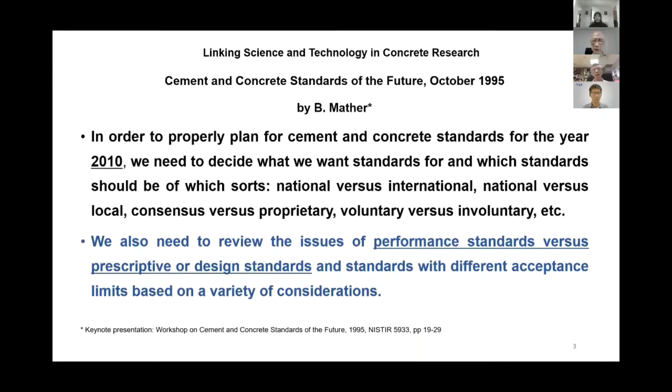Now, this concept of going into performance rather than just prescriptive or design standards, which is common—although standard conformity testing of materials is necessary, it's unfortunately not sufficient to avoid problems during actual construction practice. So today I'm trying to see what we can do with standard tests to modify and extend them to get useful information that practitioners can actually apply.

Standard tests are intended to assess the technical requirements, which are usually in a contract specification. In order to compare results from different test labs, the equipment, procedure, details on how to prepare the specimen, how to test, and the environment are highly prescriptive, so that we can all reproduce similar results using similar material.

Unfortunately, not all of those conditions that we impose on the standard test are the ones we have in practice. One of the things I learned very early is that we keep following the European practice of testing everything at 20 degrees Celsius, whereas in our environment, concrete is always at around 30 degrees in practice.

So that got me thinking about how the tropical environment needs us to adjust the way we work in concrete technology, basing on science and understanding of the technology. So today I've selected two topics.

First thing, something many of us are interested in: self-compacting concrete. One of the difficulties is how well it can pass reinforcement bars and flow around them and fill up all the space within the formwork.

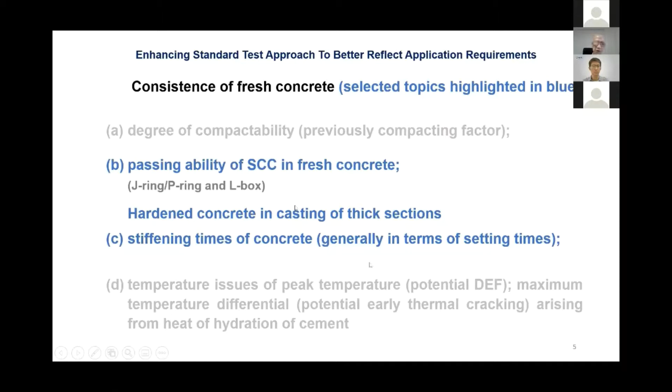That means somebody had to decide what to do at the end of the event, how we should continue. I know in practice, contractors always continue, and then we have to sort out the issues afterwards. But can we find a better way to decide what we could do? So that was the second objective.

Now this is what we call the passing ability. The word J-ring, probably because it was decided by a Japanese professor, so the J probably stands for Japan.

In this particular test, which is accepted under the EN, we have a cone of concrete placed inside the ring. We pull up the slump cone and let it flow. Some of the concrete will flow past the bars, and we have to compare the little gap here between the top of the pile and the ring, and what is on the outside, in the blue circle. The difference is what we judge to be the ability for the concrete to go past the reinforcement bars.

So you can have two types of rings. There are 12 bars of 18 mm, giving us a clear gap between the bars of 59 mm. When we have 16 bars of the same diameter, it becomes 40. So it's between 40 and 60 nominal clear spacing, which is quite common in our practice.

Now, the other measure is when the concrete flows until it reaches 500 diameter. The ring itself is at most 300. When it reaches 500, the time taken will be another measure of how well the concrete can flow.

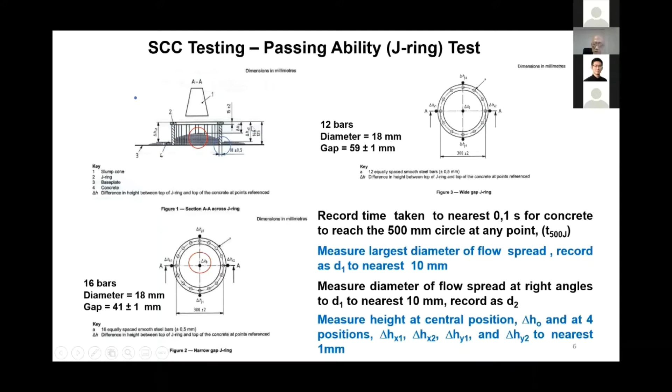Now, the passing ability of self-compacting concrete - in the US they like to call it self-consolidating concrete - using the J-ring: both in ASTM and EN we use the same ring, but we don't treat the result the same way. In the EN standard, we call it the J-ring step.

That means the change in height between the one in the middle and the concrete that flowed past the ring. This is the J-ring step, and you're supposed to have it less than 10 mm. But if you look at the actual height of those concrete, it's very close to that.

So the values in terms of repeatability and reproducibility are given in an example: about 4 to 6 in repeatability, and reproducibility 7 to 8. That means if you do the test twice, it can differ by 4 to 6 mm, and you are controlling it to less than 10. So that means there's a lot of uncertainty in the test result.

So it is not really the best test method. Now, in the ASTM, they chose an alternate method of doing it, which actually was pioneered by us in NUS.

We look at the flow diameter rather than the height. That means the flow without the ring and the flow with the ring, and we call that a passing index.

But for us, we can extend it a little bit more by using the index, which I'm going to explain further, and that will particularly give us a lot of other things we can do.

Now, this was first published by one of our final year project students, and another one subsequently did a fair bit more work on this. So the passing ability index, PAI, is the P-ring flow diameter and the slump flow.

Now we call it the P-ring because we wanted to make the ring bigger. Instead of 300 mm, we increase it to 500 mm, and we'll explain why we do that, because that will give us a lot more information and flexibility in carrying out the test to meet site requirements.

Now, so this is the slump cone. This is the J-ring, 300 mm. This is our NUS design P-ring. We call it P for passing ability. My student was suggesting maybe we should follow J-ring and call it an S-ring. I said better not — I think we just call it the P-ring, passing ability ring, 500.

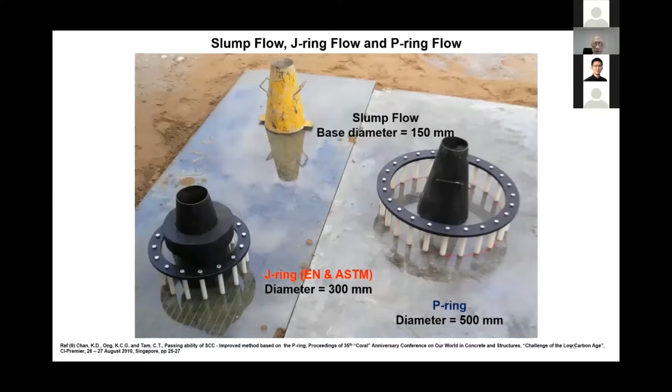Now this particular set of equipment was duplicated by our final year project student, who is now a director in one of his own concrete RMC companies in Sabah. So you can see he's a very keen person and applies what he has learned from the university to practice.

Now, in order to do the test comparatively in research, you need 3 helpers to do all 3 tests simultaneously. We all know the flowing ability of concrete changes with time. So in the research, he was all by himself — he had to do one after the other, and he complained to me that it's not fair. He doesn't know which way is the best sequence, ABC or BAC, BA, and so on. And it will make a slight difference.

So in his own study, he actually got 3 workers to do it simultaneously. And he also used Teflon bars instead of reinforcement bars because he doesn't want any friction. Because you might even argue whether the deformed bar — where the ribs, where the pips are — that will also change the behavior. So you can see in research, we are trying to be a little bit more refined.

Now, strictly speaking, we are not only talking about the gap — we are talking about the number of bars in a given area blocking the flow of concrete. So there are two ideas. If you look back at ASTM, they're talking about blocking assessment. Now that got me thinking that we should be thinking about the blocking ratio. That means in a particular cross-section, how many bars are there in terms of the width of the section, and then there would be an amount of blockage. So in a ring, it will be the number of bars around the ring, and so on. So this is what we did.

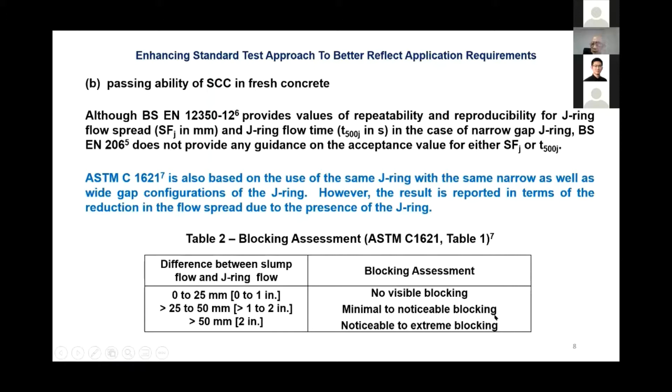So in our test, we added the additional idea of including the blockage as another parameter. So it relates to both the flowing change in diameter, the clear gap spacing, as well as the degree of blockage. So with the J-ring it's fixed — we have only two combinations of number of bars, and hence the clear spacing and the blockage are fixed, only two variations.

With the P-ring, we no longer fix the bars. The bars are put on, and we can change the number of bars by omitting some of them, and so on, using different diameters of bars. This gives us an opportunity to best simulate the project we have — from something very simple with only 20, 30 mm bars, to very big ones like 40 mm, like in a raft foundation where they are only 100 mm apart.

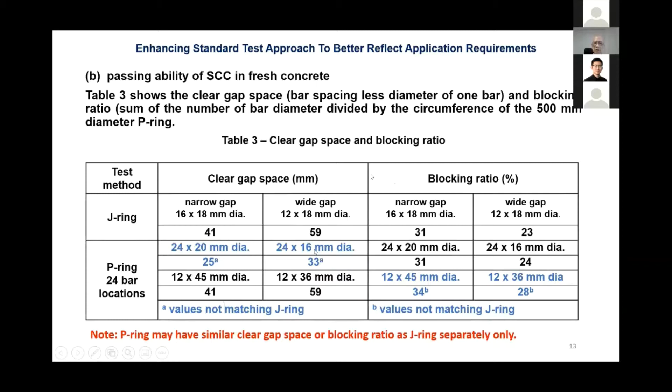Now, so that means what we can do is compare with the J-ring to get an understanding of what they have been doing, link back to practice and our experience, and yet we can now start to change the combination.

Why is the clear gap of 40 and 60 selected in the J-ring? It goes all the way back to the earlier test, the L-box. The L-box has exactly the same thing — the gap of 41 mm and 59 mm, just like the two J-rings. But then they have either 2 or 3 bars of 12 mm diameter, not the 18 mm bars, and the distance here is 200 mm. So it has also a different blockage ratio.

So you can see a lot of our so-called standardized testing are semi-empirical and do not always cater for all the needs in real practice. So that's why we start to develop the P ring to enable us to do that.

Now the width of the box is only 200, ended up with a blocking ratio of 12% and 18% of the cross-section, against more like 23 and 31 in the J ring. So we do not think that the two tests are actually directly linkable. They are separate tests having separate interpretation.

I wonder what happens if he passes one and fails the other. The engineers have a big headache trying to decide which one to say is the controlling test.

Table 3 is what we have turned up to produce later on to show what happened. With a P ring with 500 mm diameter, we have 24 equally spaced bars. We can provide different combination of clear spacing as well as blocking ratio.

Let me take an example of a very common one, raft foundation, 40 mm bars at 100 mm centers. So you can see the clear space between the bars is only 60 mm, and the blocking ratio out of the 100, 40% is blocked.

Now this is clear gap. So what can we simulate? I cannot simulate exactly equal to that, but simulate to something close to it, 58 and 41. Now, on the other hand, we have the clear gap of 59, a blocking ratio in the J ring, which is so different from the practice.

So we are now trying to see what we can do. Now, if we start to repeat the P ring test over a period of time since batching during our initial testing stage, we can notice with time what is the change in our passing ability index. That will tell us, is there a limit of the change from beyond which we should stop concreting and treat it as a cold joint.

Now, in the J-ring method and the L-box, we have no such way to make a choice. So we hope the new method will enable us to do something more, even on the job site.

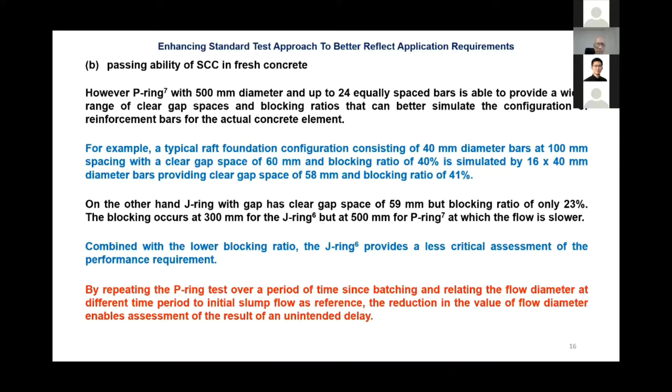But if I use 16, 14 mm, 40 mm bars, I get 58 and 41, even better. But of course, then I have to use a slightly different ring so that the number of bars that I can put around the circumference is slightly different.

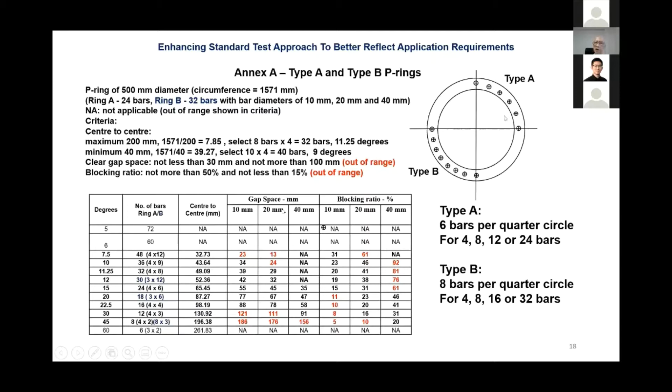So instead of the wide gap and narrow gap, we have now two types, A and type B P rings. So here is a table telling us what we can do. I won't go into it in detail, but you can see the difference between the same 500 mm diameter, only the different arrangement of the number of bars that we can put in, type A and type B.

So the passing ability index is the flow diameter with the P ring as against the flow diameter of the standard slump flow test. How much we have lost. So that is a ratio.

Now this ratio then can be diminishing with time, and we now have a control, not only go, no go, but actually decide for ourselves what is a practical limiting limit that we really cannot tolerate. Because in practice, there's always a degree of tolerance that we want to apply.

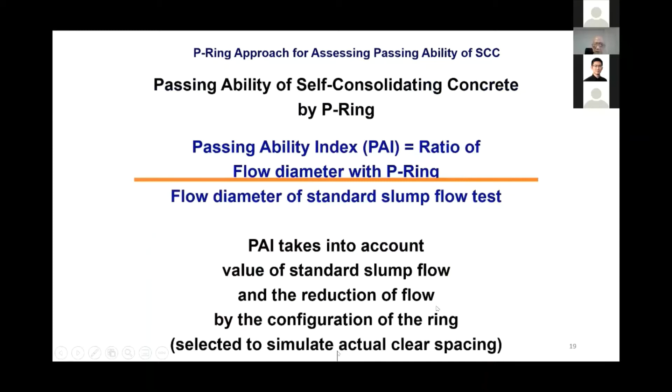So you can see that by taking into account, I can do that and give you an example of one of the tests. Here, the number of clear spacing. Here is the slump flow.

So you can see for both rings added together, producing all these experimental points. And of course, the fit is still not the best, but it's still not too bad if you look at it from that point of view.

So what we want to look at is try and use how we can do the P ring to do a better test. If you compare it with the J ring, you can obviously see the difference. I will not go into details, but the paper that we publish will give you a lot more numbers and details.

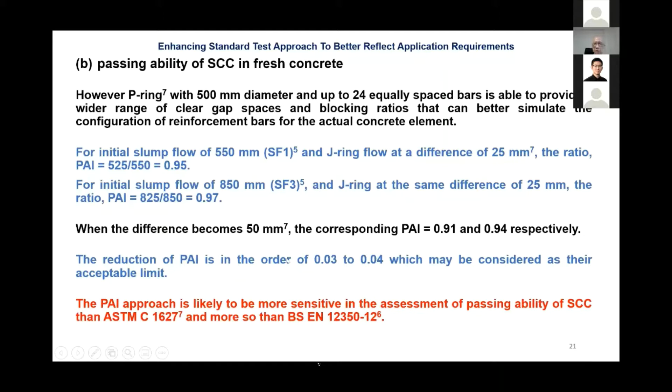But just to show you what a typical result looks like. Now, in comparison, you can see 300 to 500.

The time taken for the slump to flow after lifting the slump cone to reach 300 is much shorter than to reach 500. In effect, the time to reach 300 is so short that ASTM say don't even use it because it's so uncertain. We're talking about 3 to 5 seconds, and you have to be very fast with your stopwatch.

Sometimes the flow is not completely circular, so what do you take - the first point to reach the circle, the average, or the last point? It's so fast, you cannot do it properly.

With 500, the speed is slowed down, meaning we're able to look at the time taken to flow from the slump cone to 500. A bit longer time so the number of seconds is increased, giving us better judgment relative to the degree of uncertainty.

So you can see the passing ability of the fresh concrete over the P-ring, the flow time T500 as they call it, is much longer compared to the T300 in the J-ring. So the P-ring has a lot more flexibility.

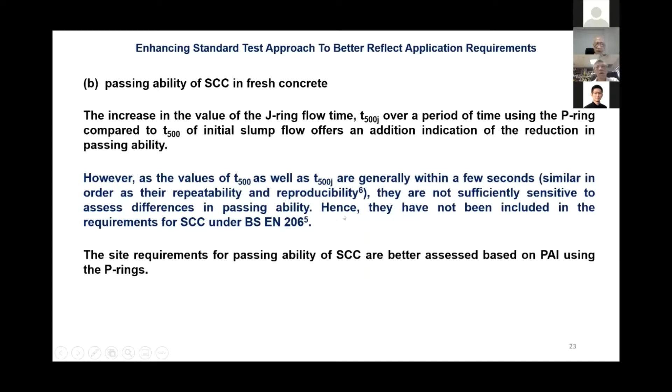I have to go a bit faster so we can get to the next topic. Basically, the advantage of the P-ring is a bigger diameter, enabling more combinations of actual bar spacing and blockage, and also enabling us to test bigger aggregate. At the moment, if you have 40mm aggregate, you have difficulty doing the J-ring test.

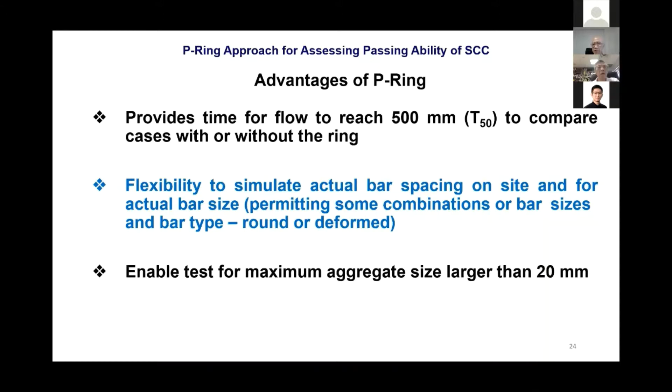The P-ring also enables us to get the flow value T500 in lieu of T300, and we also have the TF - the final time it stopped flowing. So these are all additional values we can get if we start doing the P-ring.

So now let me move on to the next topic. I hope I'm not going too slow - I tend to be slow in my talking.

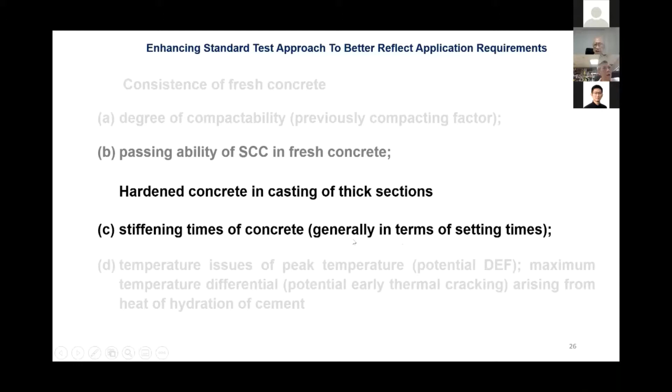Setting is a hydration process that finally reaches a solid state from a semi-liquid to a solid stage, whereas stiffening means it is in the stage of a liquid transforming to a solid. So I call it stiffening time just to make a difference.

In the UK, the BS 5075 used to have this setting time test, done slightly differently from the original ASTM test, which I did numerous times for my PhD thesis. So I know this test inside out.

Unlike the setting time of cement, which uses a Vicat needle - I wonder how many of our students still remember what the Vicat needle looked like. These days we don't make them do the lab, so maybe they're not even familiar with the difference between the Vicat needle and what we're doing in the setting time test.

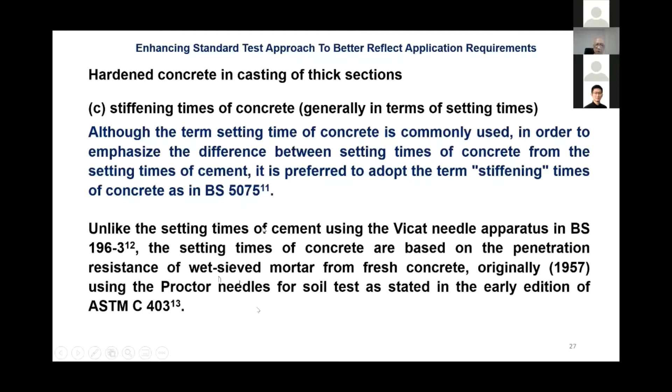In the ASTM C403, initially they start using a handheld device used by geotechnical engineers for testing clay, with a force of 110 pounds or about 500 newtons. The UK modified it and used a balance to put the specimen on and then push the penetrator into it, giving us a little more flexibility.

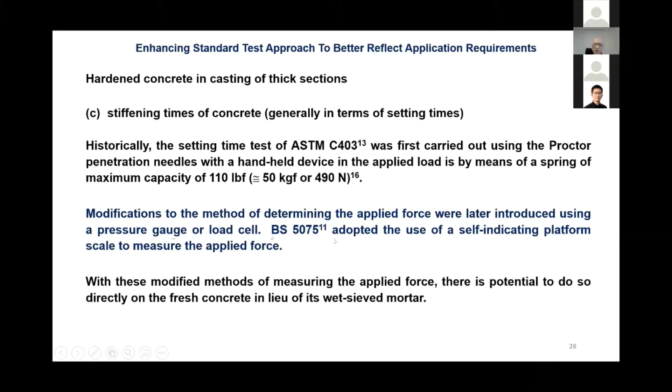Let me show you - this is the original ASTM test equipment. Those in soil mechanics will recognize this as a site tool for testing the penetration resistance for clay. In the UK, they did not want to change the different sizes to cater for different penetration resistances, so they use only a single size, and they're also not interested in the upper end.

But more interestingly, let's look at the lower end. At this one, in this particular one, it's only 0.5 MPa, and that is the time where our slump starts to fall off rapidly. That means our slump retention starts to decrease before we reach the 500 psi, which is called the initial setting time, and the other one is the final setting time.

So now we have other equipment like this with a pressure gauge, with a proving ring, and of course today we can have transducers and a lot much better method of doing the force. But I still prefer that we should use a single probe so that the side friction, for soil mechanics people, you will know, in any cylinder that you push into a soil, not only you have the end bearing, but you also have the side friction. This one will introduce very different combination.

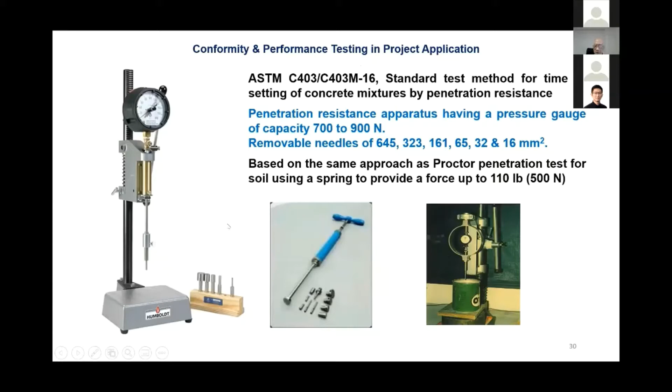So stiffening time or the setting time is penetration resistance. So the initial setting time at 500 psi or 3.5 MPa is deemed to be critical. That might end up having a cold joint.

Now this is a practical observation, or shall we say by choice on site, not because it has a particular meaning. I think our speaker later on will tell us more about how concrete stiffens, and you will understand this much better.

Now, a real cold joint is a construction joint, and you can always see a black line. But however, in our actual practice, we don't always end up with a definite cold joint. So what we have now is, in practice, the new concrete that is placed over the delayed concrete of placing

are now mixed in with a vibrator, which they always do on the job site. No matter how long the delay is, the subcontractor will never stop work because he has ordered all the concrete and he has to finish the job. Otherwise, he doesn't even know how to restart. So we always end up with a big issue on the job site. Many of us in practice have, unfortunately, occasionally faced this issue.

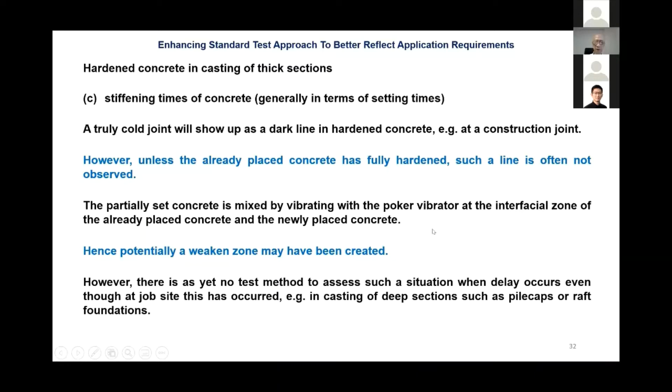So now what we actually created is not a cold joint, but a weakened zone. So this is of interest. If we have a method to decide what is the tolerance, because every time we design a concrete, there is always a safety margin to give us a lot more benefit than above the minimum that we require.

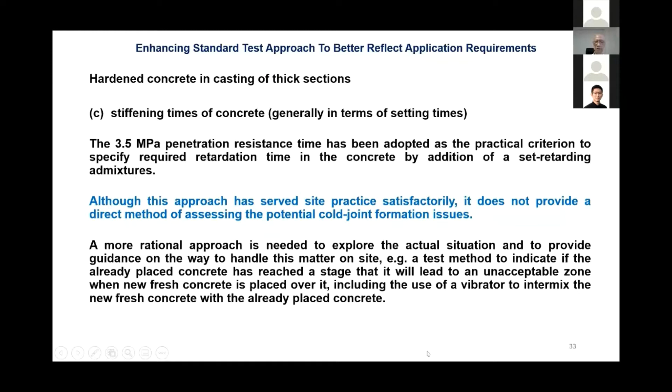So we need to make use of that side of decision making. So 3.5 is taken as it is. Okay, let's accept it for the time being until we have a better criteria. So let us see, is there a better approach, a more rational way of doing it than just that.

Now, okay, so we started a study sometime back in the university, and we now try to look at the interface. We started off by casting a beam horizontally. Then after a while, the student asked me, but on the job site, our joint is horizontal, whereas our delay joint is vertical. So it doesn't make sense.

So we use a beam because we can then use a flexural test. So okay, then we decided we did it not the best way. So we now design a vertical beam mold, 100 mm square, 400 mm long. The upper 200 will be cast later, and the lower 200 mm will have a face. That interface can be used to study what we can do with it.

So after we remove the beam, after 1 day, then we cure it and then we test. Now this is our vertical mold that we make, quite expensive. And then this is the beam that we test in third point loading. You can see here. So the student had to check whether, because we are casting the beam vertically, are we

sure we get a flat surface? So this ruler is there to look at the gap, look reasonable or not, before we do the actual flexural test.

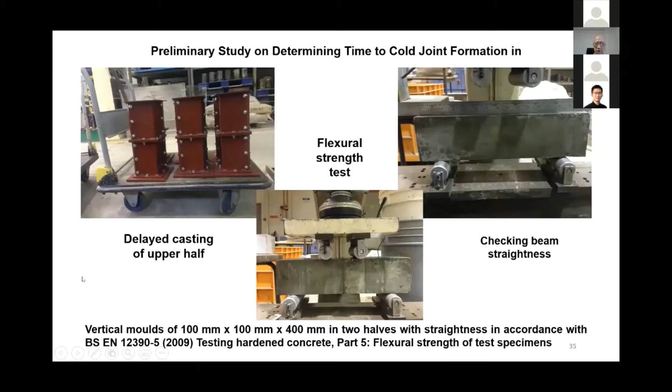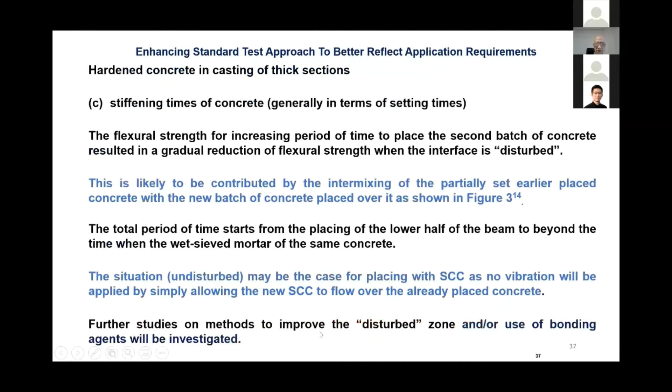So let me show you the typical result. This is what happened if we don't disturb the interface. This is the interface that we create. After 3 hours, we put the second level up.

This interface can be disturbed or undisturbed. In the laboratory, the way we disturb it is using a rod to poke through 50 mm. We put another 100 mm concrete on top, push in, mixing with the next 50 mm and create a weak zone, and do the same after 6 hours.

So when we do that, this is now what happened to the test result. If we do not disturb the surface, it falls off very rapidly. Now that means this would be a situation if you are placing SCC. You don't even have a vibrator on job site, so obviously you don't disturb the interface, you just continue pouring concrete down. But if we disturb it in our method, you can notice a very small change.

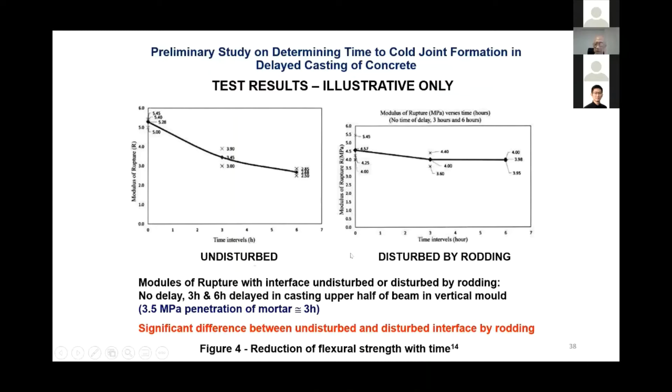So if we are a bit more detailed, we can now ask ourselves, how much decrease can a practicing engineer tolerate on a job site, knowing that the concrete is of a higher grade to start off? That means now we have a better means of making a more rational decision.

So in a preliminary study, after we have done our mortar, wet sieve mortar, we decided, why can't we penetrate the concrete? There's nothing to prevent us from doing a similar test with the concrete. So we did it. The same concrete, the wet sieve mortar at 3.5 MPa at that time, that particular mix of concrete showed us about 10 MPa.

We did it a couple of times, always around about 10 MPa. So approximately when the wet sieve mortar is 3.5, which we have been taking as a criteria for cold joint, we can now transfer it to 10 MPa in the concrete. That means now it gives us a chance to actually test the concrete on the job site.

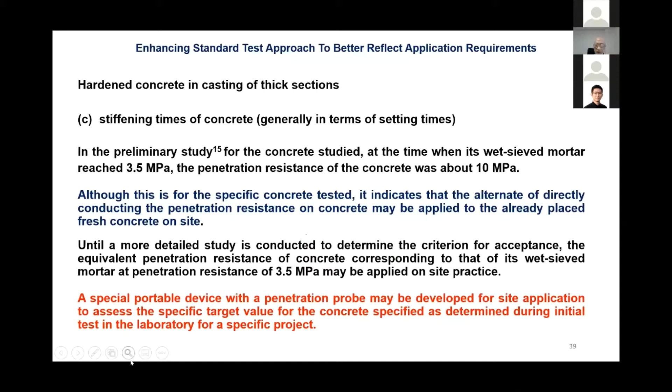So you can see now why we suggested this method, because we can now not only do that, we can start to look into remedial measures. What are these? Actually, our final year project students will be exploring this in the coming year.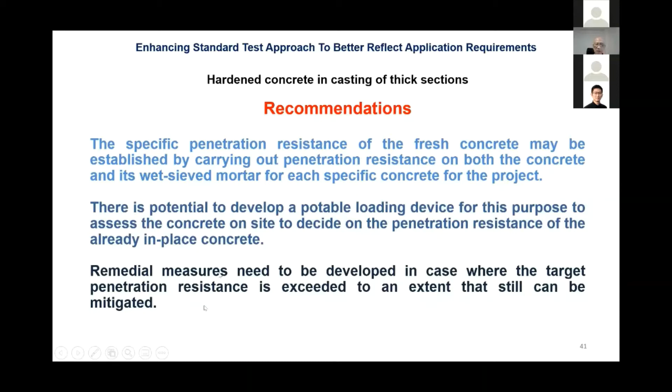Can we add a slurry? Difficult? Can we put a bonding agent without disturbing, which is easier? But if we have to disturb, can we add a stronger grade concrete? What grade do we need to compensate for the loss? Now, all these are areas for our further studies.

So I hope you all will look forward to more work and more results from us to help the industry.

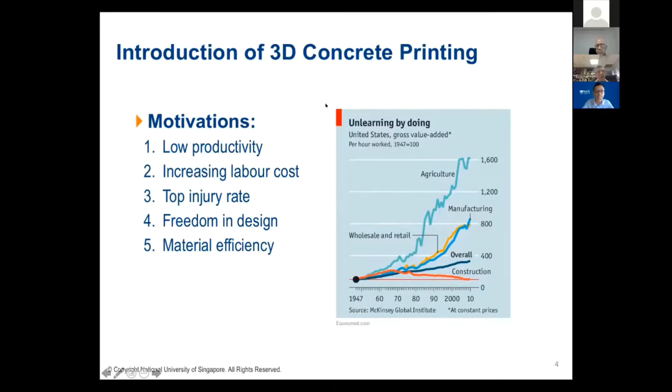Concrete printing is not only in the laboratory nowadays. Actually, there are some applications already. Two years ago, the world's first 3D printed bridge was put in use in the Netherlands. The span is 8 meters. Later, I will talk about this in more detail.

Last year in China, one university rebuilt or reproduced the Zhaozhou bridge by 3D printing, and this bridge has a 20-meter span. It's very huge. At the end of last year, GE was collaborating with Lafarge, one of the biggest concrete suppliers in the world, to 3D print concrete bases for wind turbine towers. This tower base is 10 meters high, so it's a very impressive progress in the industry.

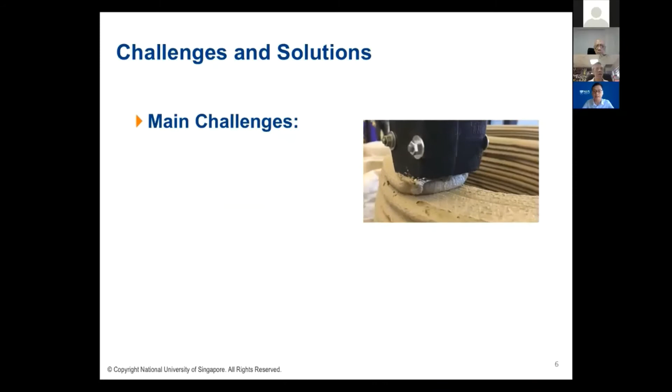So this covers why people are using this technology and how far it has gone to market. Now I'm going to introduce a few main challenges, because this is a new area, so there are lots of very critical challenges. This animation on the screen shows you a very typical layer-by-layer 3D concrete printing process.

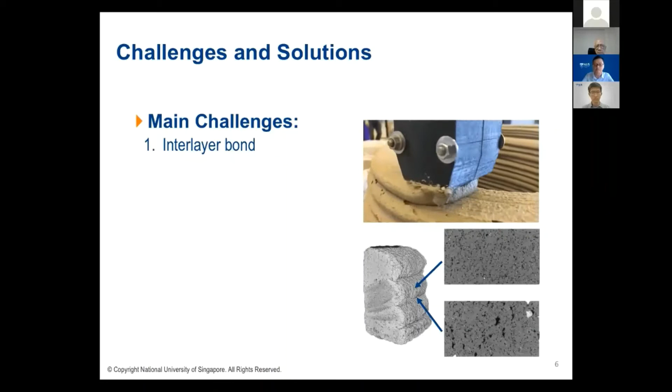The first challenge is the weak interlayer bond. I think Prof. Tam just introduced the cold joint for different concrete lifts. 3D concrete printing has a lot of cold joints because the fabrication is layer by layer. The photo at the bottom is CT scanning done by my student, and you can see the difference - this is the porosity, the microstructure at the interlayer at the bottom here, and the microstructure in the filament. It's very obvious that the interlayer has more porosity, and the pore size is much bigger than in the filament. So the interlayer bond is something that can control the concrete quality, mechanical strength, and durability.

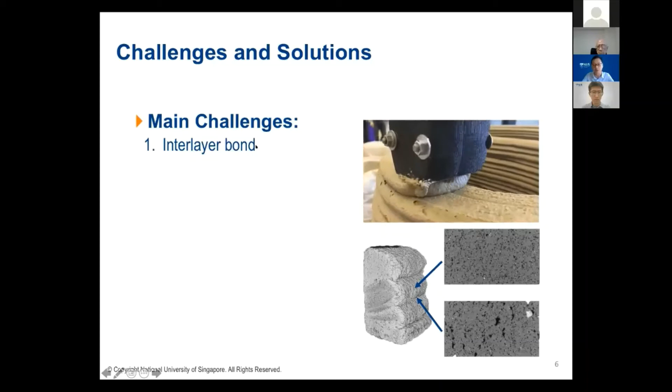There are other challenges, to name a few: integrating reinforcement with 3D printed concrete is something many researchers are working on nowadays. If you look at this photo or animation carefully, you'll find the printing ink is actually something we call mortar or paste, because there's no coarse aggregate at all. So technically, this is not concrete - this is a mortar or cement paste.

And challenge number 4 is long-term performance. We are not very clear about the performance of printed concrete structures in the long term, because this technology has only emerged within a few years.

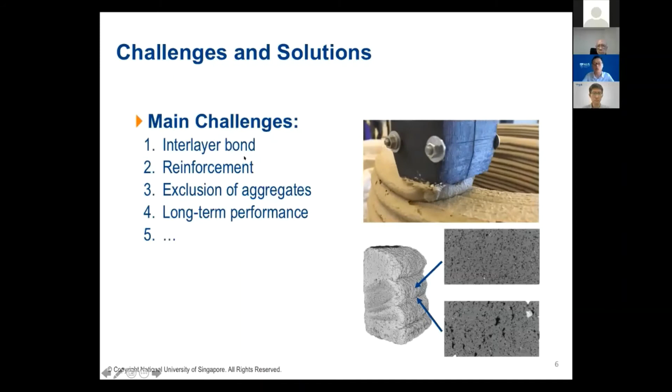There is also a lack of standardization or specification for structural design. I will focus on the four main challenges in the next few slides, and introduce what researchers are doing to mitigate or address these challenges.

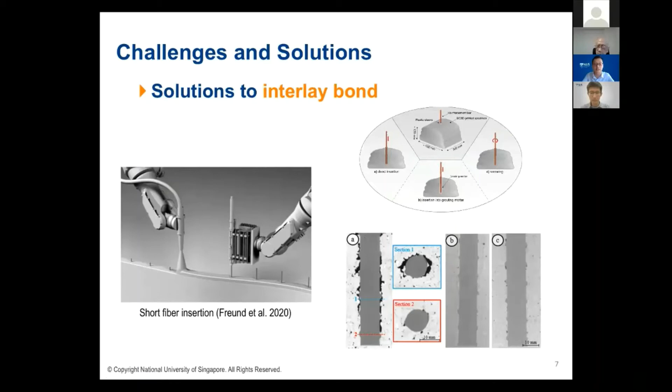Let's start with the interlayer bond. There are two main categories of solutions: mechanical and chemical. One researcher from Germany used a robot to print concrete and simultaneously insert a steel rebar. The rebar is not continuous, just short segments, to improve interlayer performance. Researchers investigated different insertion methods, including direct insertion, screwing, or insertion combined with grouting, studying the interface between the rebar and the matrix. The results showed the interfacial performance was greatly improved.

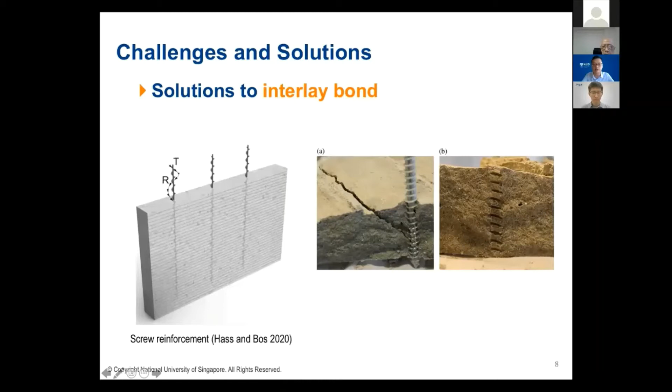Similarly, researchers in the Netherlands used screw reinforcement, based on the same idea of mechanically increasing interfacial performance. This photo shows a pull-out test, where they pull the screw reinforcement out from the concrete. There are some cracks after pull-out, but the results are also very encouraging.

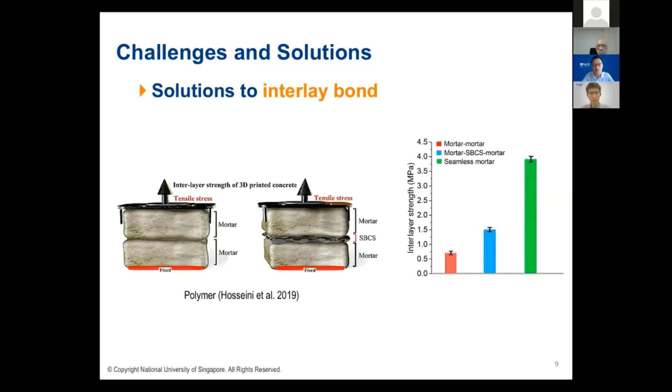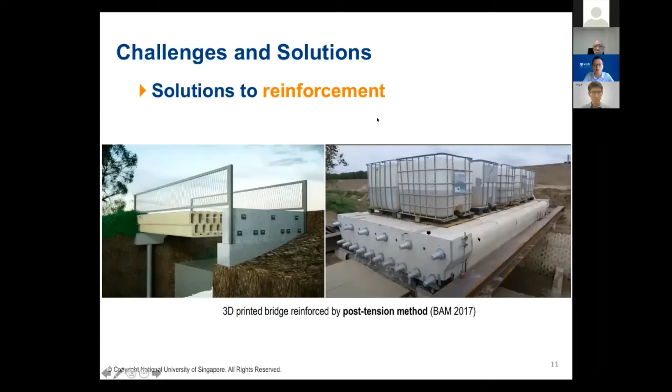Many people are asking how to integrate reinforcement with 3D concrete printing. There are a few ways. Let me first introduce post-tensioning. Three years ago, Netherlands researchers successfully printed a concrete column and a beam with hollow sections, using the post-tension method to reinforce the 3D printed beam. They applied steel rebar and then put tension on it so the concrete parts could be compressed and integrated. This is how they did preloading testing. The bridge has now been in use for two years, and I believe the condition is very good. This is the post-tensioning method from the Netherlands.

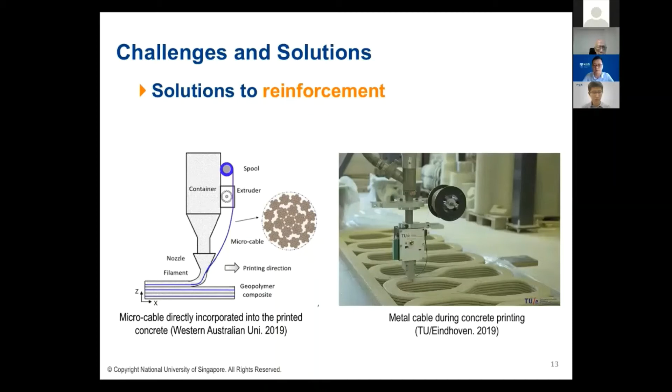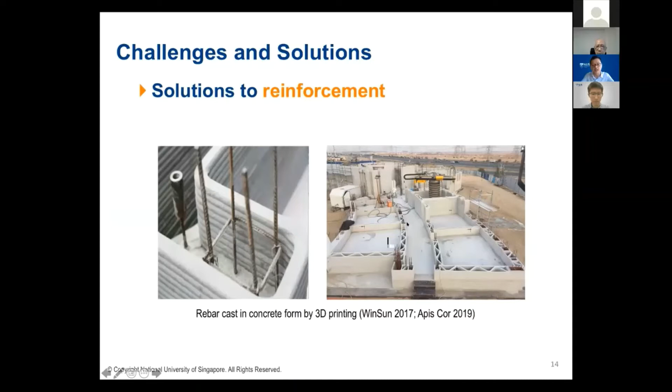Okay, so another challenge is how to include coarse aggregate in printable concrete. This is extremely challenging because the coarse aggregate will reduce the flowability and the rheology a lot.

It's still very challenging. Okay, here I want to introduce my work. This is done by my PhD student, Mr. Yu Shiwei in Melbourne. We introduced the aggregate bed 3D concrete printing.

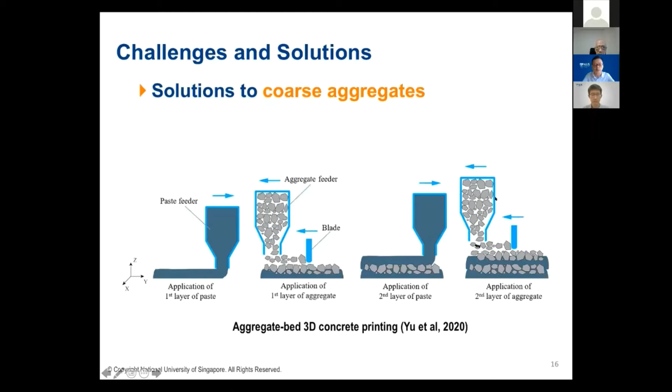Later I will show a short video of the main steps. This is the 3D printer we used, a gantry type 3D printer. The cement paste or mortar is put into this black color paste feeder, and it's injected or extruded from this printing head. Everything is controlled by the computer. We designed the model and gave the printer the order to print according to our print path.

So here is one short video to illustrate how it works.

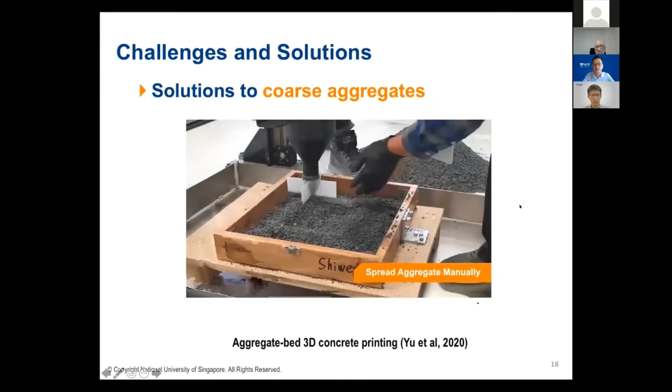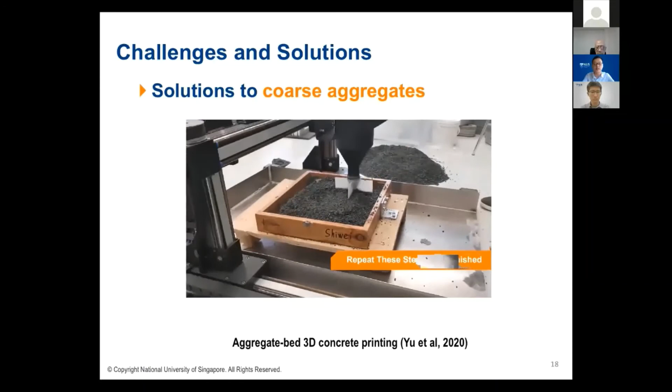This is the aggregate bed in the box, and we print a cement paste layer so the cement paste can diffuse into the aggregate. Then we spread aggregate on top of the cement paste, which gets bonded by the cement paste at the bottom. Then we spread the coarse aggregate, print the second layer, and repeat the spreading and printing. We keep repeating these procedures until we realize the product we have designed.

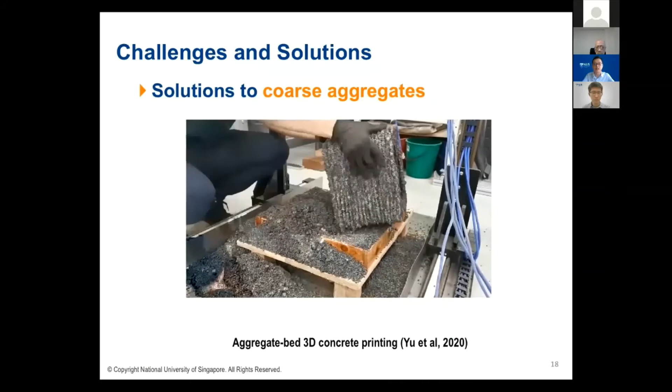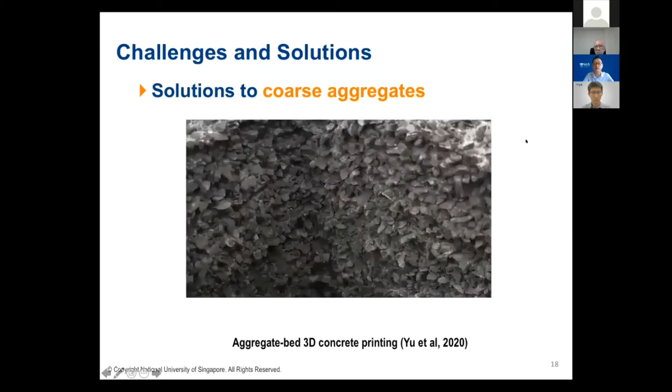So we leave everything in the box for 24 hours. Then on the next day, we remove everything, and the product is here. The unbound aggregate can be recycled. This is the final product. You can see the coarse aggregate can be successfully integrated during the printing process.

For the final printed product, the aggregate content is about 40% compared to traditional 3D printed concrete. This is quite high already because traditionally there's no aggregate at all. Another good thing is the unbound aggregate can be reused, so basically we are not wasting any materials. My PhD student is currently working on materials optimization, numerical modeling, and automation of the aggregate spreading. If you have interest, please download this paper through this link. This was newly published, so it's free to download.

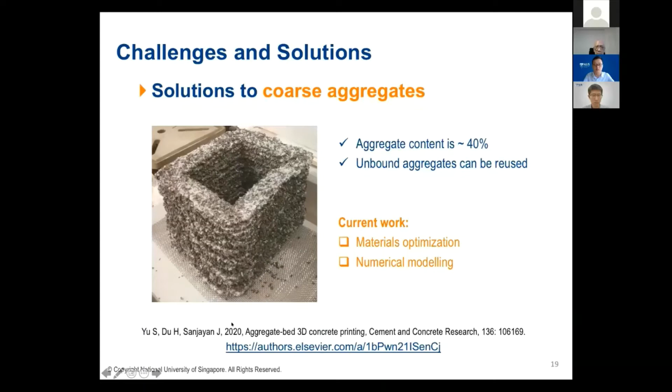Okay, the last challenge to 3D concrete printing in today's talk is long-term performance. Research in this area is very limited because people just started working on 3D concrete printing. But earlier this year, one research group in Belgium started to look into the performance of the concrete in a chloride environment. You can see the white or silver color is the chloride penetration depth. One thing to note is this is the interlayer, so actually the penetration depth would be deeper at the interlayer. I think this is strongly linked with the pore structure.

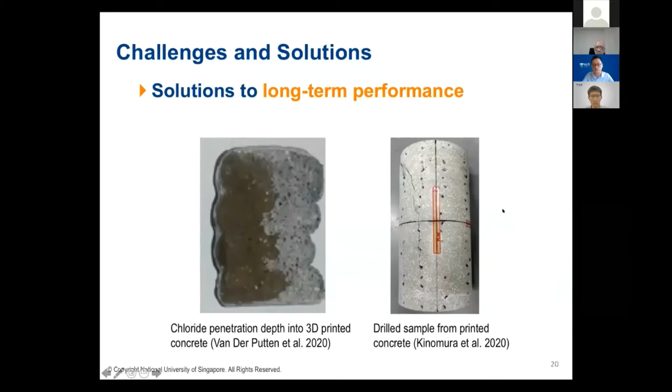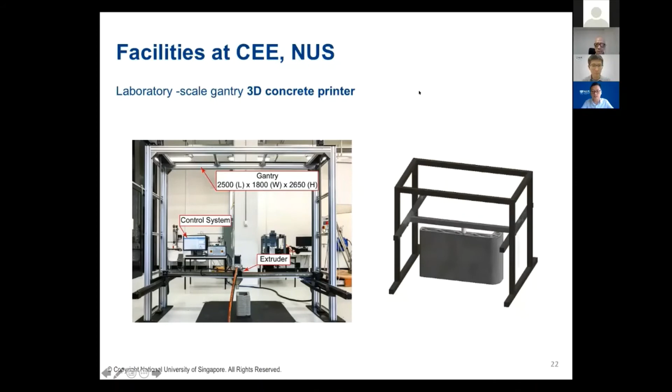I have to acknowledge Ms. Deng Jinyu, a second-year undergraduate student who helped me build this animation. It's very obvious to see how it works. If you want to print a hollow wall, it can be done very fast and without any formwork.

In addition to the 3D printer, we also have a rotational rheometer, which is very important to design the suitable printing concrete. And there's another equipment called digital image correlation, which could help us monitor the deformation during or after printing.

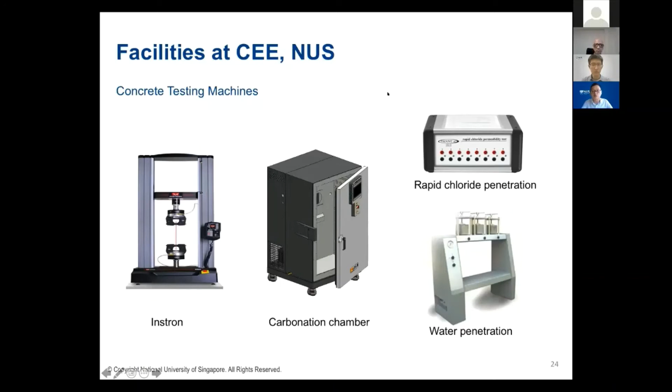Lastly, I would like to introduce a few standard concrete testing instruments with high accuracy and high capacity: a carbonation chamber, rapid chloride penetration, and water penetration testing. This can give us the right instruments to characterize the printed product. Finally, I would like to acknowledge my students, collaborators, and sponsors.

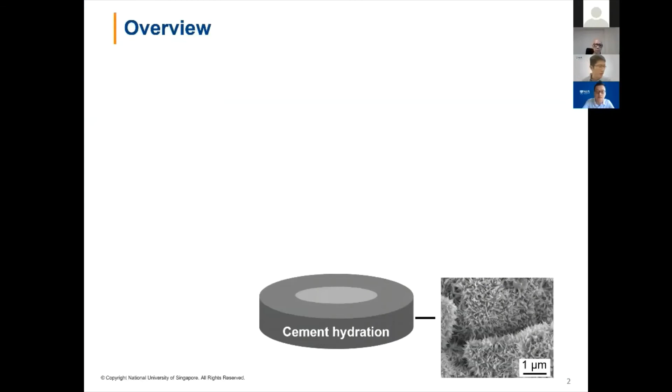The research community of cement and concrete is interested in a very long list of questions, starting from the hydration of cement to the fresh state of concrete mixture, to the performance of hardened concrete, to the durability of concrete, and to the sustainability of construction materials. Obviously, it's not possible for me to summarize all of them in 20 minutes, so I will give you what I think is important and what we are currently working on or planning to work on.

So let's look at the hydration mechanism. Portland cement is the most widely used cement nowadays in construction practice. It's mainly composed of clinker phases such as C3S, C3A, C2S.

Right now we are not completely sure about the hydration mechanism of these phases when they mix with water. We're also looking for ways to numerically model the kinetics and the hydration rate of these phases in a precise way. We're also trying to understand more about how the porous microstructure of the hydration product develops and how it evolves with hydration time, and how it influences the macro scale property of our concrete, for example strength, permeability, and diffusivity.

To give you an example, C3S is the most important clinker phase in Portland cement. When it meets water, it will produce CSH and CH. CSH is the most important binding material in our modern concrete. This reaction can be classified into 3 stages.

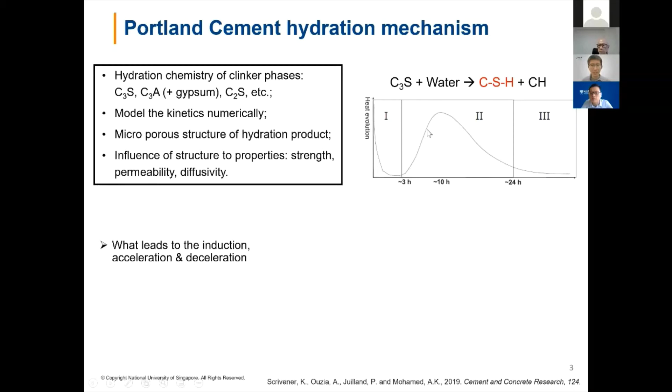We have a very special stage here when the hydration rate of C3S is very low, and this stage gives us the time window to cast concrete, to place concrete, and to pump concrete. However, we're not completely sure what is the reason that leads to this very slow reaction rate. We also don't know what triggers the termination of this period, after which hydration enters an acceleration and then a deceleration period. All of this still remains mysterious to us.

In the meantime, we notice that changing the chemical composition of the cementitious system will change the morphology of the hydration product a lot.

If we have aluminium in the hydration product, the CSH growth changes from one-dimensional growth into a two-dimensional growth, not into needles, but into foils, into sheets. So this provides us the possibility of engineering the chemistry of cementitious systems so that we can control the morphology of the hydration product and further control the macro scale behavior or performance of our concrete.

Now, in the meantime, we're also interested in developing new cementitious systems. We want to provide new binding systems.

For example, over a very long time, we have accumulated a lot of experience of using supplementary cementitious material such as fly ash or GGBS. And the cutting edge research is trying to push the limit of using these supplementary materials as much as possible in cementitious systems and to understand their benefit to the long-term durability of concrete.

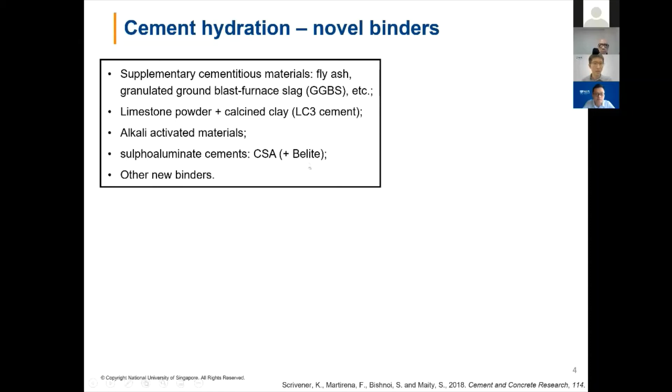And in recent years, there are other very hotly studied cementitious systems, such as the limestone powder plus calcined clay system. We call it LC3 cement. Also the alkali activated materials is very popular these recent years, and also the sulfoaluminate cements with or without belite phases, and many other new binding systems.

Now, to give an example, let's look at the LC3 system. In this LC3 cement, we replace 50% of Portland cement clinker with calcined clay, limestone, and gypsum. Those 3 materials are conventionally considered as not reactive. But we figure out that even though we replace half of the cement clinker with these non-reacting phases, we're not sacrificing the strength of cement paste too much.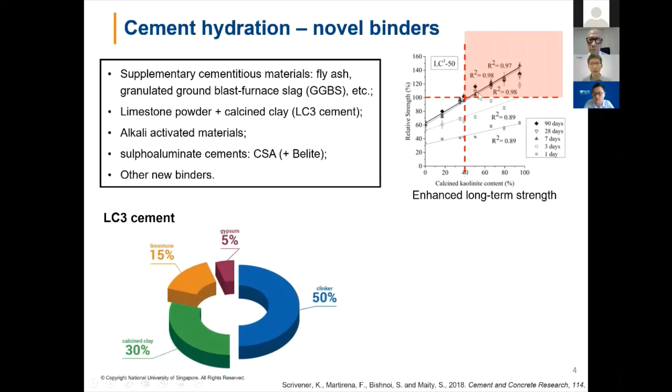Now, moving forward to the fresh state. For the fresh state of concrete mixture, we're interested in understanding the physical origin of the yield stress of the mixture. We're also looking for ways to precisely measure them. We are also trying to understand more of how the chemical admixture interacts with cement particles, and how that affects the workability of our cement. And we're also trying to model the shear behavior of concrete mixture in a more precise way.

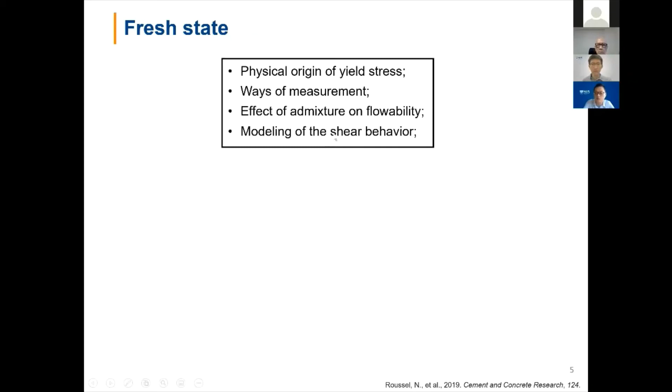For example, for the fresh cement mixture, we already know that the rheology behavior of the fresh mixture is a result of the competition between the Brownian motion of the cement particles, which is the random motion of cement particles in water, and the colloidal attraction between the particles, and the buoyancy of the particles in water. If the Brownian motion dominates, we see that the suspension will not have any yield stress. That means the cement particles will not touch each other; they will be away from each other. And this is exactly what we want during the casting and pumping stage. We want the cement to be extremely flowable and pumpable.

If the colloidal attraction forces dominate, that means the cement particles would like to be touching each other, and then they will form a percolated network with interacting forces, and the whole matrix will have some type of strength. This is what we want when we want the cement paste to harden faster, to set faster. If the gravity force dominates, then the cement particles will simply sink down, and this will result in significant segregation and bleeding problems, which is something we want to avoid.

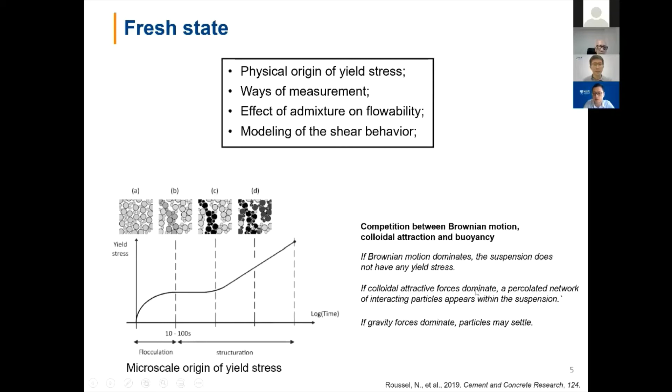Now, moving on to the hardened state. The cement and concrete research community has been looking for ways to design products that have a specific performance for a very long time. For example, we're trying to design concrete that has high strength or ultra high strength. We want to design concrete that has extremely high workability so that it can be self-consolidated. We also want to design concrete to have low hydration heat, or to have low weight, and many other performances.

As an example, in recent years, one of the most attractive topics is to develop ultra high performance concrete. Ultra high performance concrete usually has a compressive strength higher than 120 to 150 megapascals. It has an intensive dosage of fiber reinforcement, and it is able to self-consolidate.

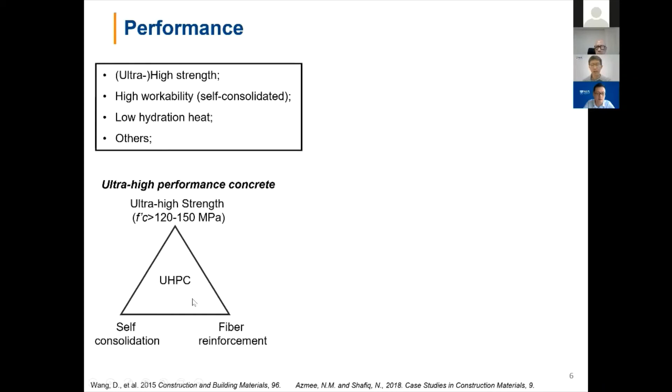There are already some market available products. If you look at the recipe of these products, you'll see that they all have a very high content of Portland cement, at the scale of 1,000 kilograms per cubic meter of concrete. They all use fine sands instead of a combination of fine and coarse sands. They all have a high dosage of silica fume, of steel fibers, of water reducer, and a very low usage of water. With this recipe, we're able to generate a matrix that is very dense and very strong.

If you look at the microscale image of conventional concrete, the interfacial region between the paste and the aggregate is usually very weak and porous, and that's the weak zone - the place where concrete will fail first. However, in ultra high performance concrete, this weak interfacial zone is now completely fixed. It's very dense and strong. The addition of fiber further enhances the strength of the concrete and also enhances the ductility of the concrete.

Using all this knowledge, we still need to figure out a better way to select and proportion different raw materials. And we have to understand and better control the loss of workability of the UHPC so that the time window to place the concrete is longer.

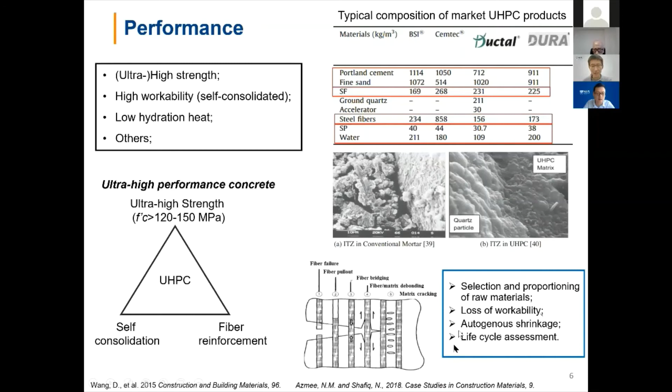Now, moving on to the durability of concrete, the research community has long-term interest in a list of phenomena that cause the degradation of concrete. For example, steel rebar corrosion, sulfate attack, drying shrinkage and creep, carbonation, and many other phenomena.

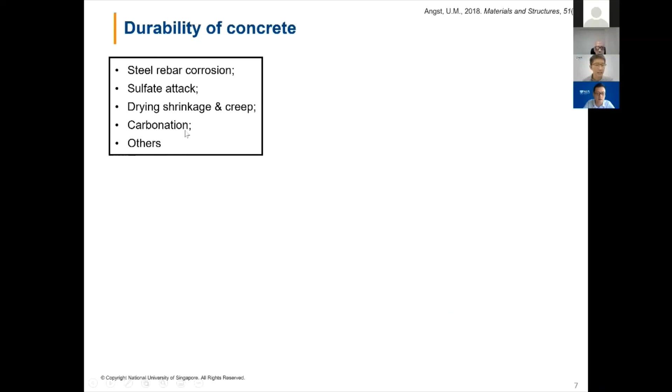To give you an example, for steel rebar corrosion, we already know that when we place steel rebar in concrete, the surface of the steel rebar will be covered with a thin film. We call it a passive film. This film is very dense. It prevents the steel from corroding. However, if the pH value of the concrete drops, or if we have chloride penetrating into the concrete, they will destroy this passive film, and they will result in active corrosion of the steel rebar.

In many standards, they define a concept called critical chloride content. That means when your concrete contains a critical amount of chloride, we consider the rebar to be at a danger of corroding. However, different researchers have reported very different values for this critical chloride content. Some researchers say that if you have a chloride content of about 0.8%, then your steel will corrode. But others say that the critical chloride content can be as high as 2.1%.

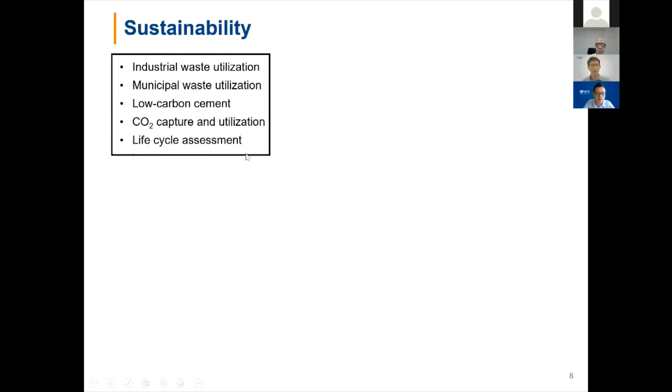Now, to give you an example, in Singapore, every year, there is a large quantity of sewage sludge produced by our wastewater treatment system.

These sludge are currently all incinerated to ash. We call it incinerated sewage sludge ash, ISSA, and this ash is completely disposed of by landfilling in the Semakau landfill. Every year, the amount of this type of ash is at the scale of 30,000 tons. We are looking for alternative ways to deal with this waste so that we consume the capacity of the Semakau landfill at a slower rate.

If we look at the chemical composition of this sludge ash, we see that it has a high content of silica, aluminium, and calcium. This is very comparable to fly ash, which is already a well-established supplementary cementitious material. That means this incineration ash can potentially be used as a supplementary cementitious material as well, to replace cement.

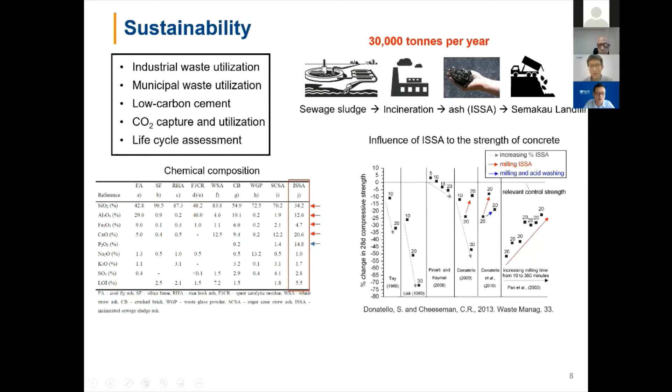There are already some researchers working on this. From existing studies, some researchers found that adding the sewage sludge ash will significantly decrease the strength of concrete. But others found the decrease is negligible - only about 10% decrease in strength if we replace 20% of cement with this ash.

There are researchers showing that simply by grinding this ash, we will significantly increase its reactivity. So there is a lot of work to be done to facilitate the usage of the incineration sewage sludge ash as a supplementary cementitious material in Singapore.

We should monitor the physical and chemical nature of our local incineration sewage sludge ash over a long period of time. We need to explore proper treatment methods to enhance the reactivity and ideally also to recover the phosphorus inside the ash, because this is a valuable fertilizer material.

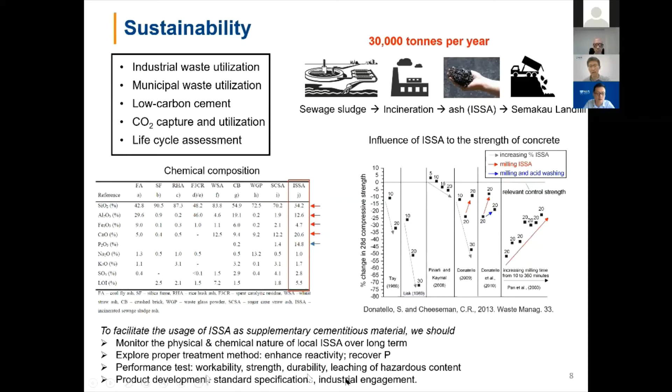We also look for better performance tests to track the workability, the strength, the durability, and also the leaching of hazardous contents from the sewage sludge ash over the long term. Lastly, we're also looking at product development. We want to develop concrete products using this ash that satisfy local standard specifications and also meet the demand of our industrial partners. So why do we need to answer all these questions?

In the new era of climate change, there is a worldwide trend to develop the cement and concrete industry into a circular economy. This provides both challenges and chances for Singapore. In Singapore, we don't have that many natural resources, so we want to provide more options - developing new concrete recipes using new cementitious materials and new aggregates.

Also, Singapore is a world pioneer in novel construction practice, such as PPVC, prefabricated prefinished volumetric construction. This requires the concrete to be very workable, so we have to enhance the performance of our concrete to satisfy this construction practice.

In the meantime, Singapore, as a tropical country, has a warm, wet, and marine condition, and this is the most unwanted condition for rebar corrosion. So we have to monitor the long-term behavior and long-term fate of our reinforced concrete infrastructure in Singapore.

And lastly, Singapore has a high standard for environmental targets. That means the concrete industry should contribute to the recycling and reuse of industrial waste and also municipal waste. Now, all these questions are actively being studied by our concrete research teams in NUS Civil Engineering.

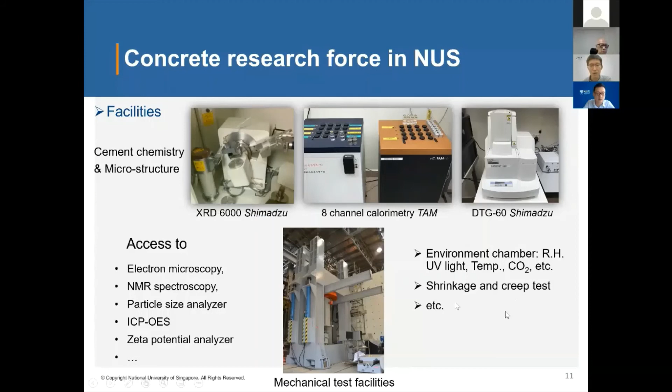So to close my presentation, our mission is to advance the science of cement and concrete research, as well as to serve the local practice. We're happy to take questions, and you can also email your questions to us.